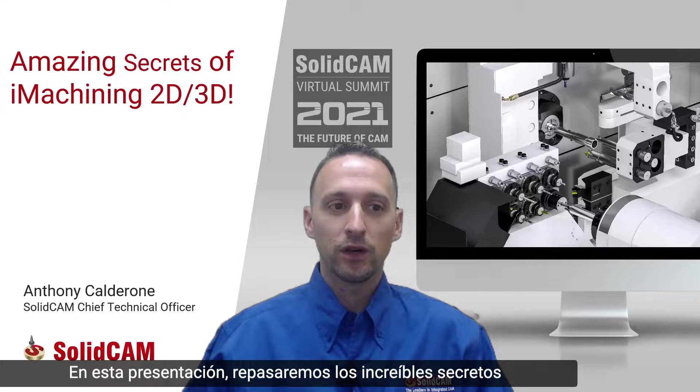In this presentation, we'll be going over the amazing secrets of iMachining 2D and 3D. So iMachining is made up of two modules. The first is the Intelligent Toolpath Generator, and the second is the Technology Wizard.

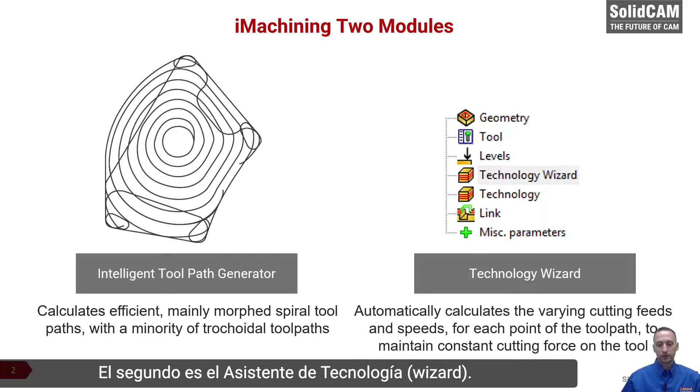So before we talk about the secrets of iMachining, let's talk about what iMachining does. iMachining is about saving cycle time at the CNC. Here we'll go over a couple quick slides about some of the savings. Here we have iMachining 2D being used on aluminum for electronic products. You can see we have aluminum 6061, and this customer had 400 pieces to produce. Their standard machining time before iMachining was 17 minutes, and this decreased to 6 minutes.

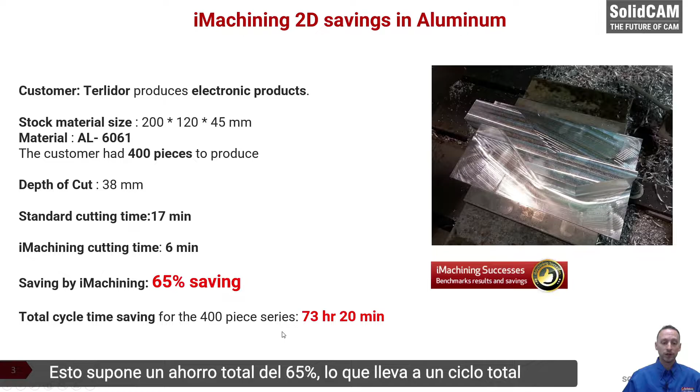So this is a total savings of 65%, which leads to a total cycle time savings on the whole part run of 73 hours. Here's a really small titanium bracket. This customer had 75 pieces to produce, and this part went from 17 minutes down to 3.5 minutes, which was a total savings of 80% per part, for a total time savings for the complete run of over 16 hours.

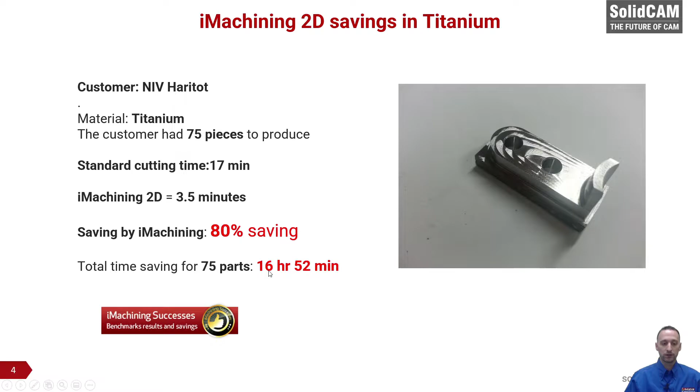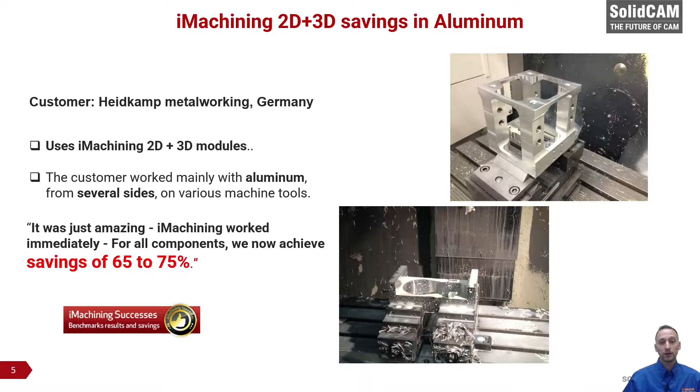We have a customer in Germany who uses a combination of iMachining 2D and 3D, which most of our customers are doing. For them, using aluminum parts, they're generally seeing savings of 65 to 75%. What's nice to notice here is that iMachining is giving an amazing savings amount, whether you're doing soft materials such as aluminum or something very hard to machine such as titanium. Here's another part which is cut in steel, and this part went from 146 minutes down to 28 minutes for just this one single component.

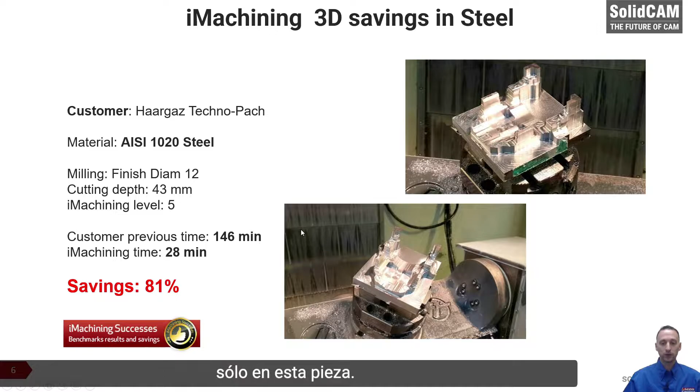Now, besides the reduced cycle time of iMachining, there's another major factor on the CNC, which is reduced machine wear. The iMachining toolpath, and we're going to be reviewing this, is a constant load toolpath throughout the entire cutting process. What you'll notice when most of our customers are cutting with iMachining is spindle load ranges in the 4 to 17%, and it stays constant through the entire machining cycle.

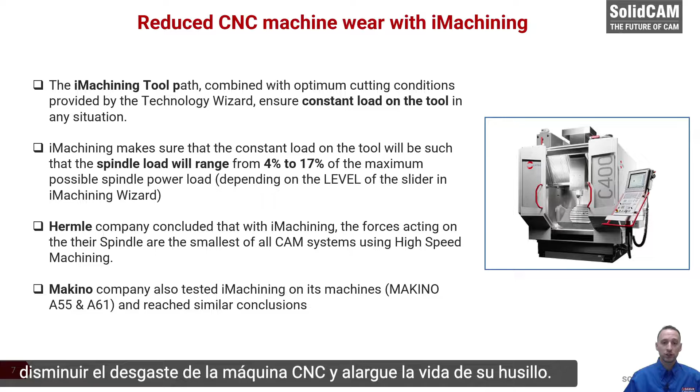Hermle actually concluded that iMachining was the best toolpath with the constant force of all high-speed machining toolpaths. And Makino also tested iMachining on its machines and reached similar conclusions. In the end, a constant load on the spindle is going to decrease your CNC wear and extend the life of your spindle.

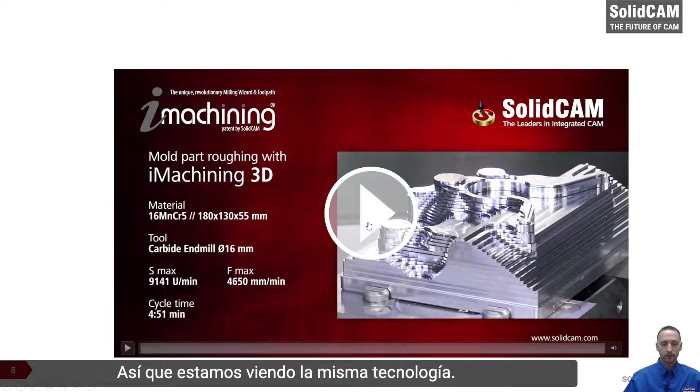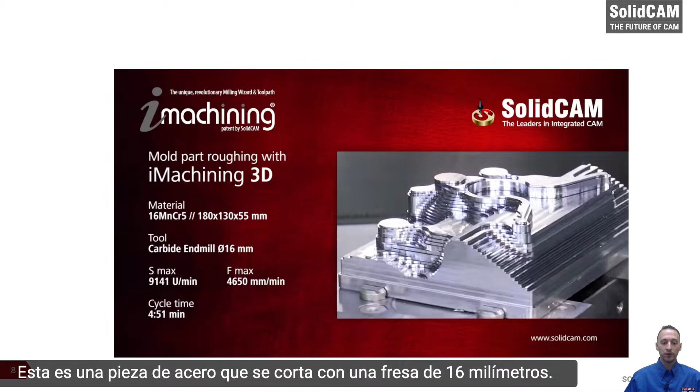So why don't we watch a quick video on iMachining 3D. Remember, iMachining 3D is using iMachining 2D, so we're seeing the same technology. This is a steel part being cut with a 16mm end mill. I know most people watching this are thinking this is aluminum, but this is steel. With iMachining 3D, this uses our step-up technology to bring the model to a near-net surface finish.

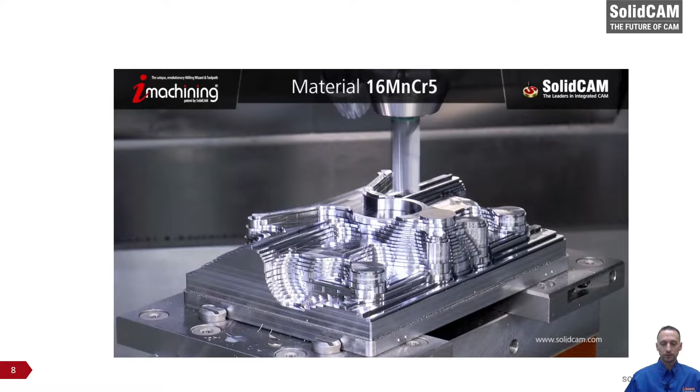Okay, so when we watch these high-speed machining videos online, many people are questioning, well, that's great, in a single video you can make something amazing show, but how does an everyday customer achieve this? I think this is really where iMachining sets itself apart from every other CAM system out there: our customers are achieving those results day in and day out on every part they cut. And I'm going to go over the secrets of why this works and how this works.

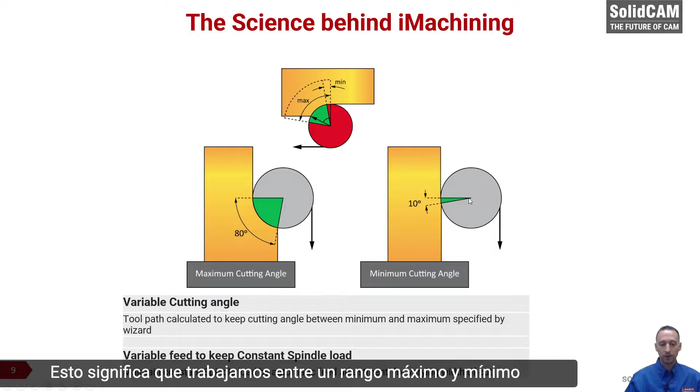So the science behind iMachining. The most important thing to note is that iMachining uses a variable cutting angle. This means we work between a maximum range and a minimum range. And we also use a variable feed to keep a constant spindle load. Now we use variable feed to keep a constant chip thickness. Before we get into chip thickness, I have a small video I want to talk about and actually show.

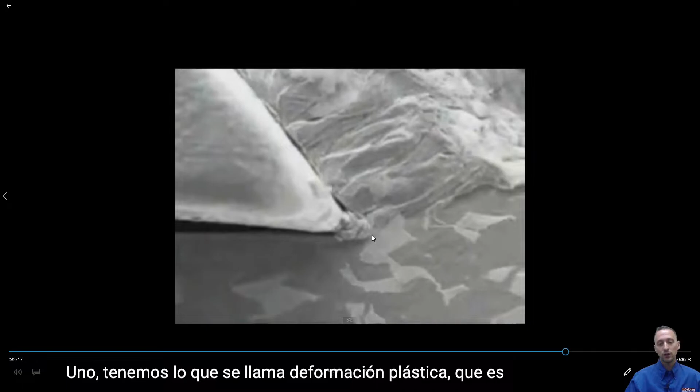This is a close-up video of not a helical end mill, but a turning insert, so that we could get a very high magnification of what the cutting process is. I'm going to press play and we're going to talk about this. What we see here is the insert being drawn across the material. What actually happens here is two things. One, we have what's called plastic deformation, which is at the tip of the cutter, you can see that the material is going from a solid to kind of like a soft liquid here.

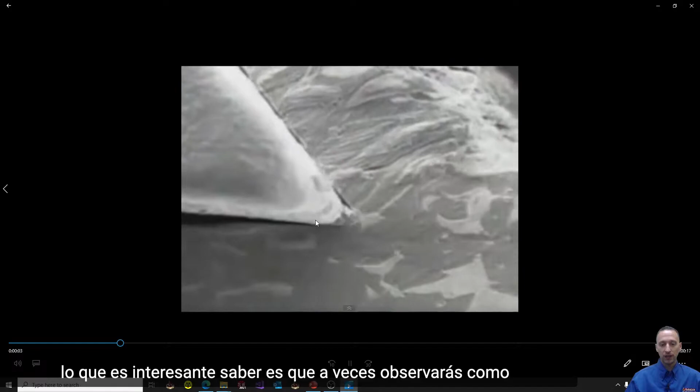And then you have shearing. So for the material to actually break the bond, so that way you get a chip, you actually have to have this plastic deformation and then the material is shearing off. As you watch this cut, what's interesting to note is that you will sometimes see some of the chunks come back along the underside of the tool, and then that rubs against the back part of the relief.

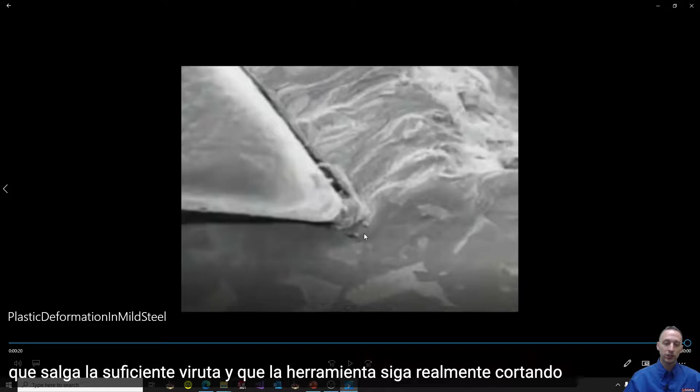Now, when we talk about cutting and machining, a lot of times people are talking about getting underneath the material, like pulling enough chip that the tool is actually cutting. And this is a very important thing to notice, because you could imagine here, if we weren't taking a big enough chip, this plasticized material right here would be constantly rolling around the bottom, and instead of getting a nice shearing effect where 99% of the material is being drawn up the cutting edge, you're getting maybe half of the material where some will come up, some will go down, and this is a problem.

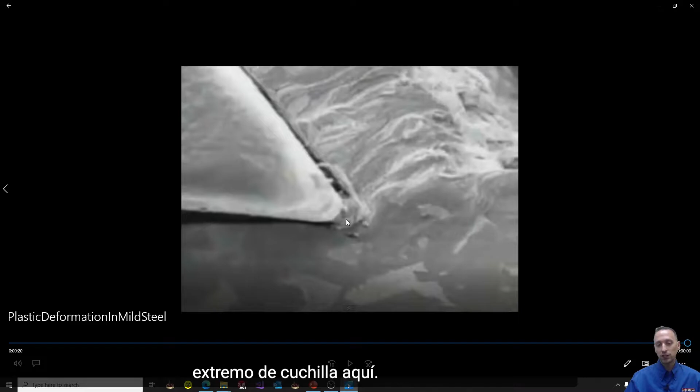And now when you do look at different tools for different materials, you'll see that this corner radius will change. Obviously with aluminum cutters, you have more of a knife edge here, and in aluminum they're able to cut more than having this brute force kind of shearing effect. But you can't use a very sharp edge in steel, because this plasticized material in steel will end up breaking down that cutting edge much quicker than it does in aluminum.

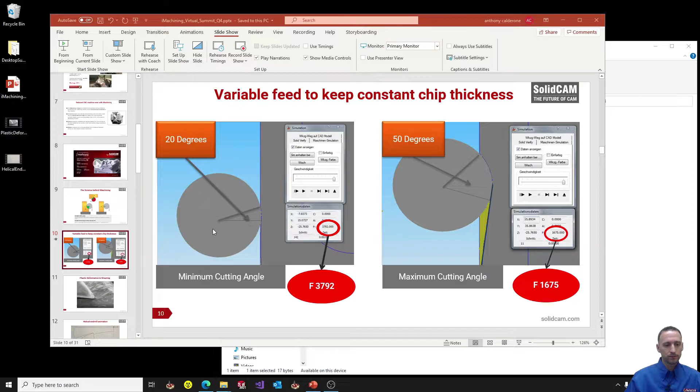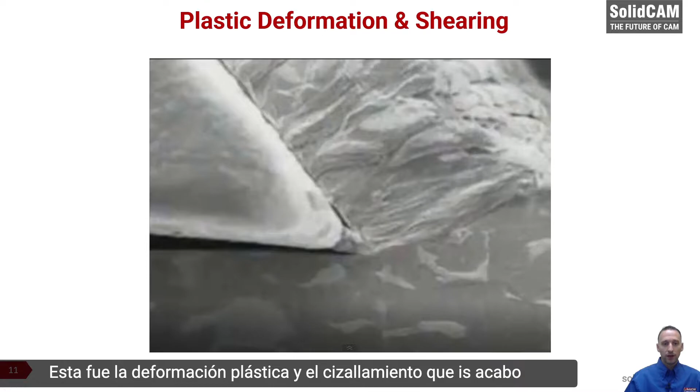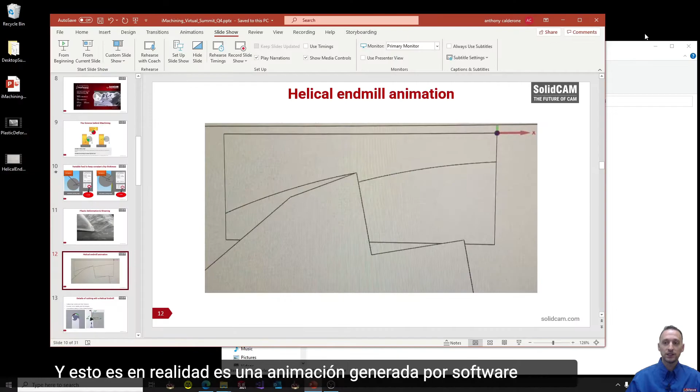Let's go to our slide again. So we use a variable feed to keep that constant chip thickness. This was the plastic deformation and shearing that I went over. And then I have one other animation I want to show, which is a helical end mill animation. This is a software generated animation, because we can't actually record a cross-sectional view of what a helical end mill looks like cutting.

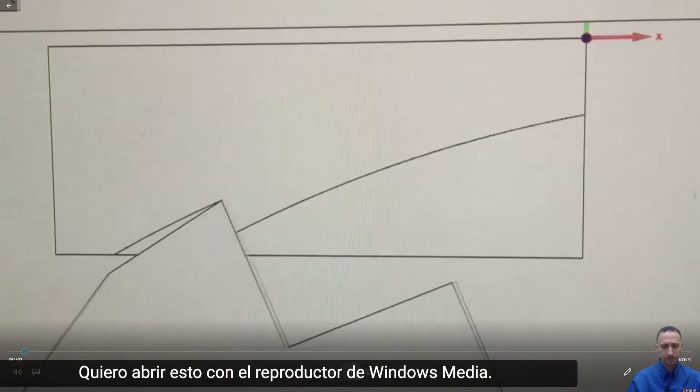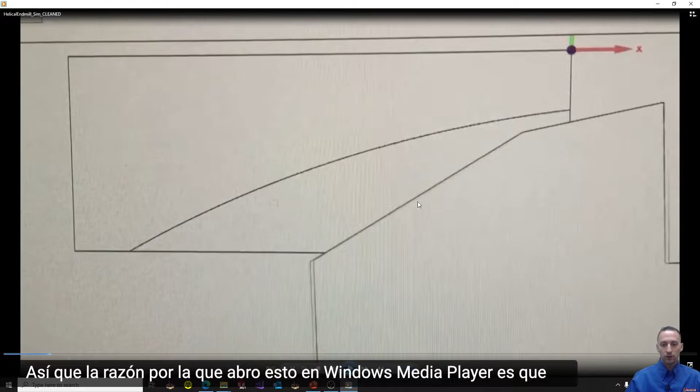Oh, I want to open this with Windows Media Player. So the reason I open this up in Windows Media Player is I am going to go frame by frame.

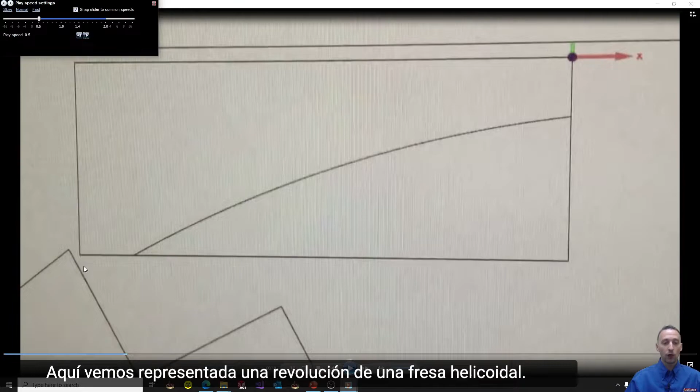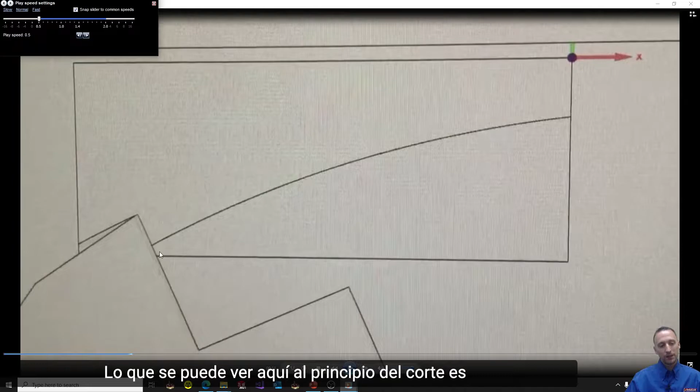Now what this animation is depicting, and when the flute comes back around I'll show it, is one revolution of a helical end mill. And so this is the x-axis. So basically the tool is moving along the x-axis, and as the tool is moving, it's also revolving, and it's cutting. So let's look at this process. What you can see here at the beginning of the cut is our chip thickness. So this is where that shearing is happening.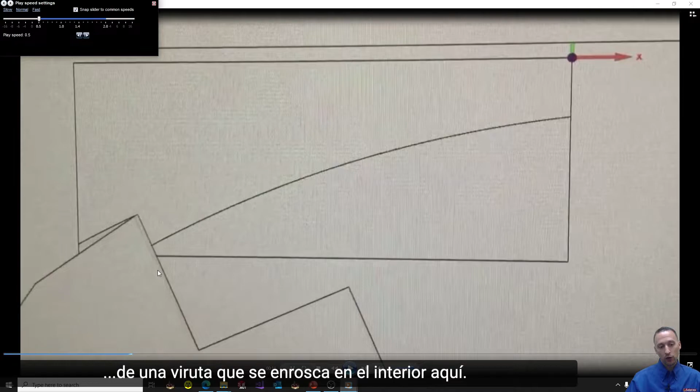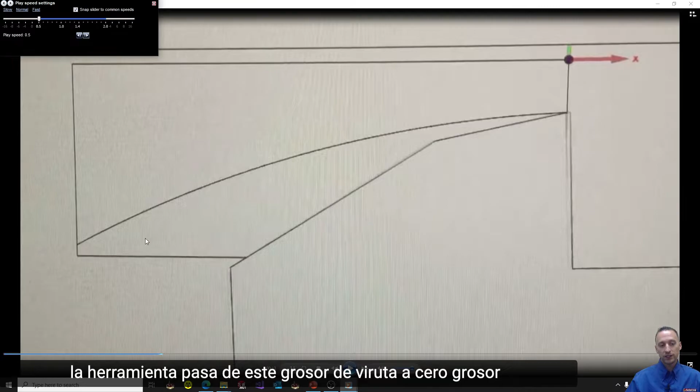So if we think about the previous video that we did, right here at this very tip, this is where we're getting that plastic deformation, and you now have material in the form of a chip curling along the inside here, and as the cutter does its full revolution, that's what it ends up with, one complete chip. And if we continue playing, you can see in this one revolution, the tool goes from this thick chip thickness to 0 chip thickness.

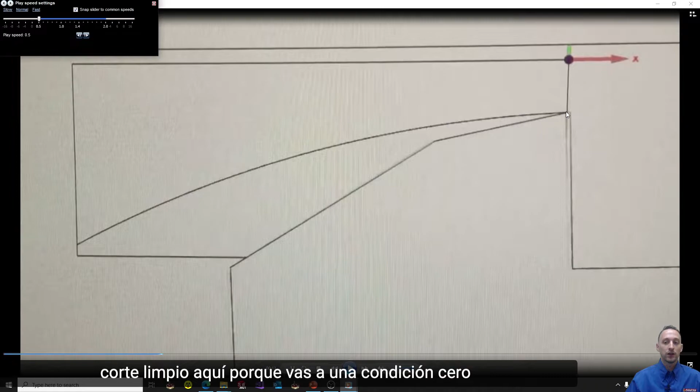So this is a very important thing to pay attention to, that the tool is actually going from cutting its full thickness of material to 0 material at the very end. So when you think back to that plastic deformation video, when the tool is down here at the bottom, you're probably not really shearing off and getting a perfectly clean cut, because you're going to a 0 condition and you get it kind of rolling along the back side of the tool here, and the material being plasticized is deforming and it can push a little bit.

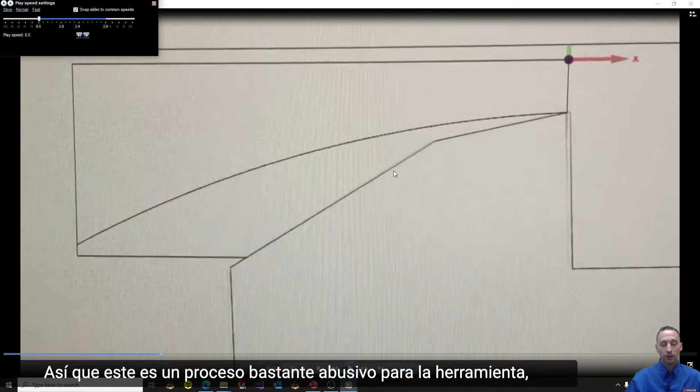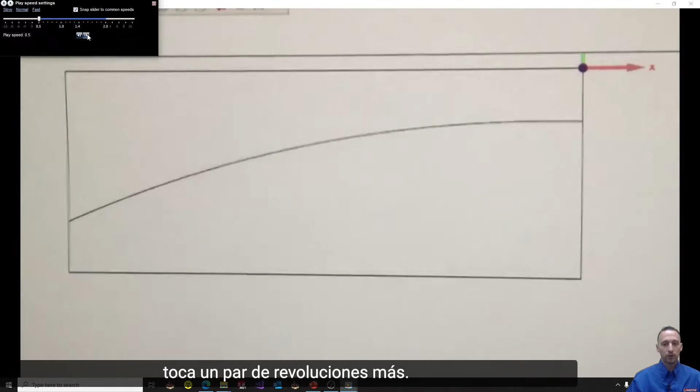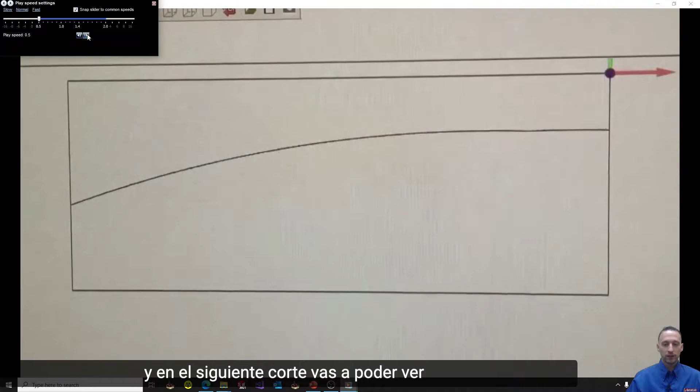So this is quite an abusive process for the tool, and I'll play one more revolution. So as the next flute comes around, we're going from the thickest part of the chip, it's revolving, and then we go down to 0. And I'll just play a couple more revolutions. I'll zoom in a little bit here. And once it does one more revolution, you're actually going to be able to see a little bit of the scallop on the wall.

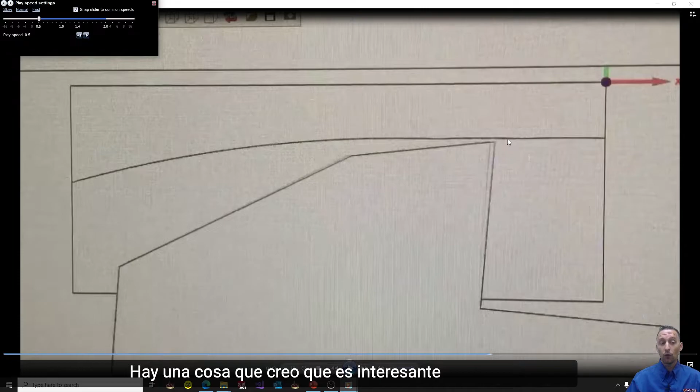So it's probably a little hard to see, but here you actually get the scallop, right? So this is the peak of the scallop and the peak of the scallop. So when we talk about the surface finish, or the RA finish of the material, this is the height of this scallop. And one thing I think is kind of interesting to mention is that there is the theoretical scallop or surface height.

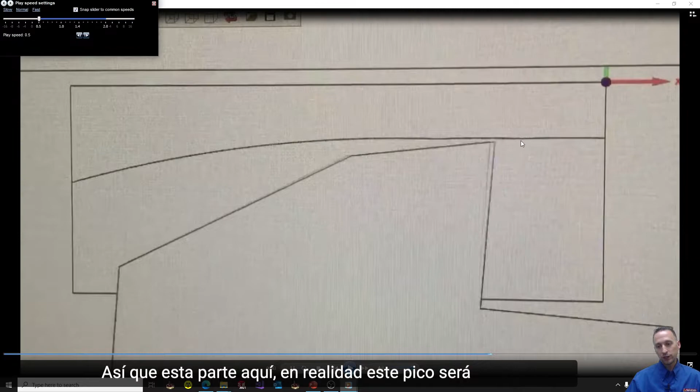And in iMachining, you can actually select the surface finish that you want. But in reality, when the tool is cutting, as we saw from that plastic deformation video, you don't get the perfect scallop like you think here. So this peak is probably almost always going to be a little bit higher in real life than what the theoretical perfect scallop would be.

Now we'll go back to our presentation from the current slide. So we talked about the helical end mill, so let's talk a couple things about climb, conventional, and full slot cutting. If we were to take that helical end mill and do a full slot cut, which is depicted here on the left, you can see that the tool would actually be going from the thinnest part of the chip, reaching to the thickest part at 90 degrees, and then coming back down to the thinnest part.

Now you can imagine, if you're cutting something like aluminum and you have a very sharp cutting edge, it might be okay when you're starting down here at the thinnest part of the chip, but it's still not good for the tool, because it needs to deform that chip right there at the cutting edge, and it needs to plasticize it enough that it can shear it off. So anytime you're starting with conventional cutting like this, you're not getting cutting right away, and that's bad.

So realistically, when you're doing conventional cutting, the tool is probably not really pulling a chip until it reaches about here, or maybe here in the cut. So that whole time, the tool is really just jamming itself, and more than a chip being formed, you're getting that glob of material that's actually rubbing along the back side of the flute on the relief, which is really bad.

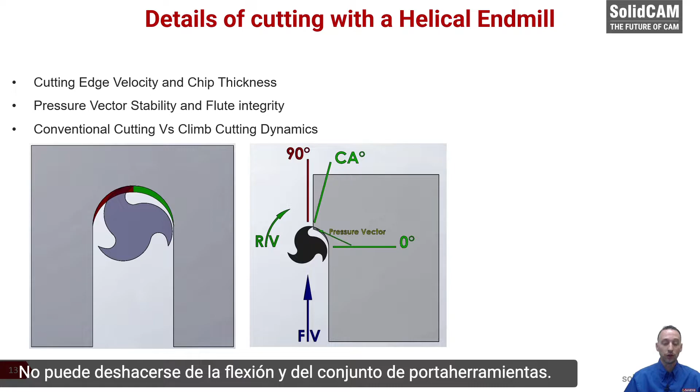So you're actually getting opposing forces from the beginning of the cut and the end of the cut. You're getting pressure this way at the beginning, the tool is revolving, it's coming this way at 90 degrees, and then down at the bottom, it's coming this way again. And that is not good for the spindle, and it's not good for the tool, because there is flex. You cannot get rid of the flex in the tool holder assembly. So we don't want that flex, and we want to try to limit it.

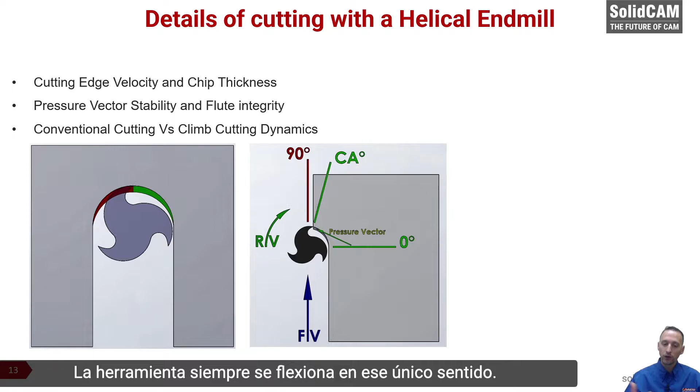So iMachining is limiting itself to this 80-degree range, so that way we're always climb cutting and keeping that cutting direction the same, so the tool is always flexing in just that one way.

Chip thickness and chip load: are they the same? As we know, if we open up a machinist handbook, everything is going to be about chip load. And chip load refers to the amount of chip at 90 degrees. So this is the thickest part of our chip. Chip load and chip thickness are the same value at 90 degrees. When we are actually cutting not at 90 degrees, the chip thickness is not matching chip load anymore. So let's say we had the same chip load and we're trying to run a chip load of 4 thou.

When you are cutting less, let's say 40 degrees, the chip thickness is actually not 4 thou. So what does that mean? That means the tool, let's say for that material on that tool, it wants to reach a 4 thousandths chip load or chip thickness where the tool will properly shear away the material from it and form a nice chip. Well, if you're going less than 90 degrees, your chip thickness is actually smaller.

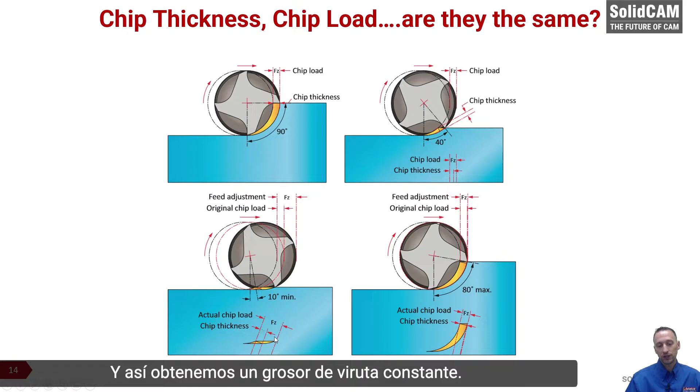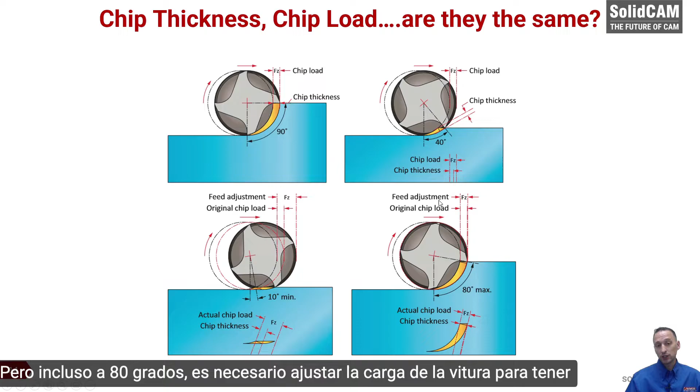And if we come all the way down to like 10 degrees, here's this little graph. You can see the original chip load is here. This chip thickness is very tiny if you don't increase the feed rate. So what iMachining does is we actually adjust the feed rate so we have a constant chip thickness. So if this tool wants to have a chip thickness of a certain distance, we need to maintain that. And if we look at 80 degrees, you can see that 80 degrees is pretty close, but even at 80 degrees, you need to adjust chip load to have a constant chip thickness.

Another important part of getting a constant chip thickness through the cut is feed of the center of the tool versus the edge of the tool. So if we think about runners on a racetrack, the runner on the inside track is always staggered further behind everybody else because he has the shortest linear distance around the track. The same thing is happening with an end mill because the CNC is controlling the feed rate at the center of the tool. But the reality is the cutting is happening at the edge of the tool.

So in iMachining, we adjust feed rates on arcs or linear segments that represent arcs. This means on internal corners, we are actually slowing the feed rate down so that we can get a constant chip thickness. If we don't correct the feed for an internal corner, you can see that FZ, the chip thickness out here at the edge of the cutter, is huge. We want this FZ right here along the straight wall. You can see up here it's about 2 to 2.5 times larger. Now when we correct the feed rate and slow down for internal corners, the same chip thickness that we have on a straight line is the same that we're getting on an arc.

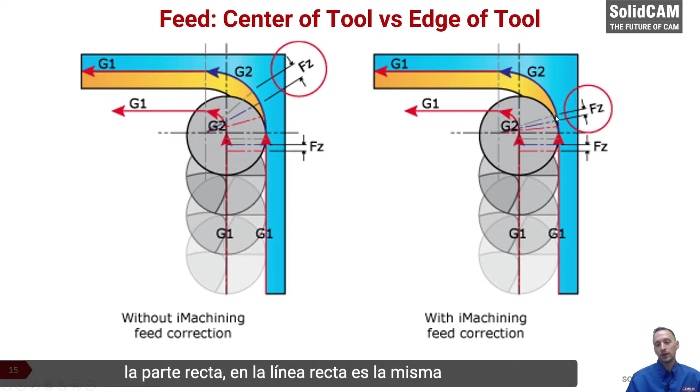So what is an iMachining toolpath and what does it look like? A couple of main things you're going to note with iMachining. One, we have controlled step overs. So you're never going to see any overloading of the tool, and this is a lot of the engagement angle stuff that we were talking about. You're also going to notice that there's exact stock machining. This means there's no air cutting, and this is important because we manage how much of the tool is actually engaged with the stock at every part of the cutting.

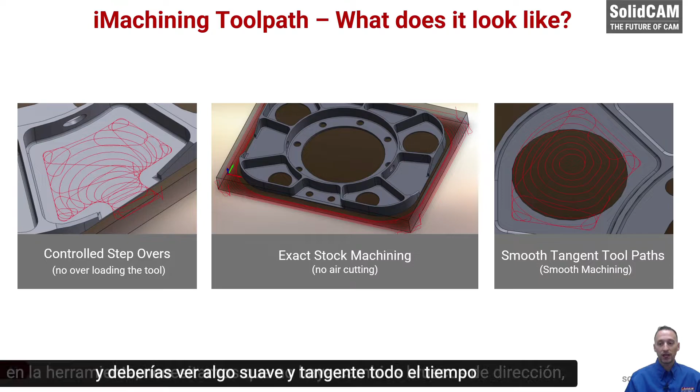And then we have smooth tangent toolpaths. Obviously, if we want to control the load to be the smoothest on the tool, we need to not have abrupt direction changes, and you should see something smooth and tangent the entire time.

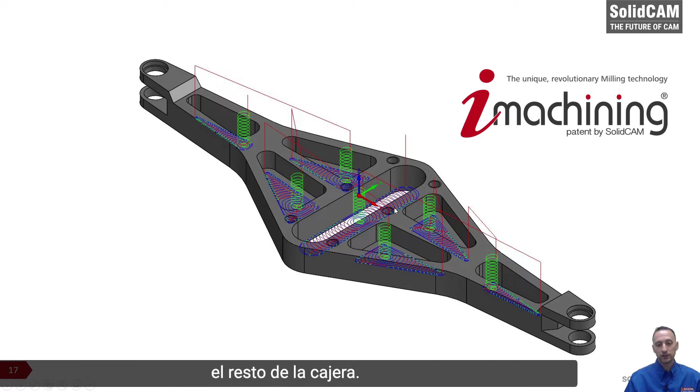So here's a part with several pockets in it. Generally what you're going to notice with iMachining is, if it's a closed pocket, you're going to see a helical entry into the center of the pocket. You're going to see a morphing spiral from that circle out to whatever the shape of the pocket is. And then you're going to see parallel passes to clear out the rest of the pocket. This general process you're going to see no matter what the geometry is.

Now here we have an example of a pocket with some islands. Generally, with a lot of our customers, we don't see many pockets that have islands in them. It seems like electrical housings like this one are parts that generally have multiple islands, or at least more than one island. But this is a nice example to show the process of what we do.

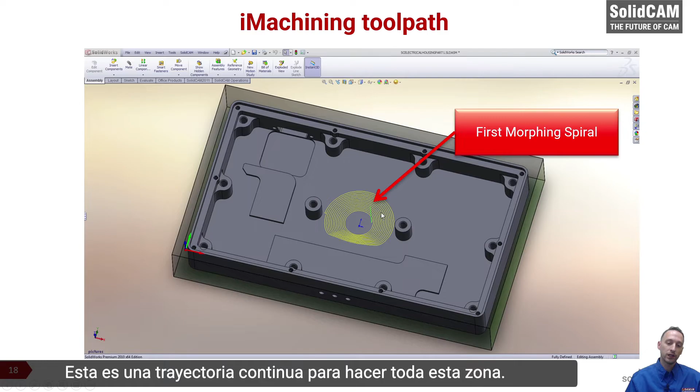So first we have a morphing spiral. We pre-drilled the hole so we didn't see the helical entry. It plunges down into the hole. This starts from a circle, and then look at the shape it morphs out. You can see more dense toolpath down here and a lighter toolpath up here. So this is one continuous pass to do this entire area.

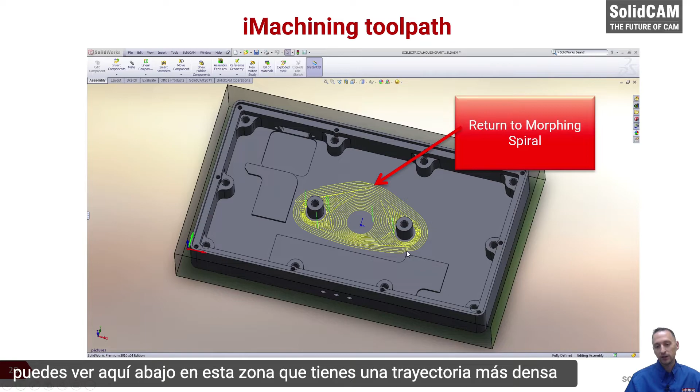When we hit the islands, we have what we call separating islands or separating channels, and these go around the islands, and after the islands are done, we are now able to go back to morphing spirals. And once again, with the morphing spirals, you can see down here in this area, you have a denser toolpath, and along the other areas, you have a thicker toolpath.

Then we run into an island again, so then we make a moat around it, and then we go back to our morphing spiral. So that's the basis of what you see with the iMachining toolpath. Now, what do we do when we run into iMachining 3D?

So as you saw from iMachining 3D, we do scallop step up. And what is scallop step up? What this does is we give a constant net surface finish across the entire model. And so all the user has to do is say what scallop he wants, which is the distance from the final target model. And then iMachining automatically calculates different step downs and step ups to achieve that.

So over here on the left-hand side, we have just a cross-section of a very simple tapered pocket. So as we see on the less steep area, we have 7 or 8 passes. On the steeper area, we only needed 4 passes. Both of these give the same scallop height.

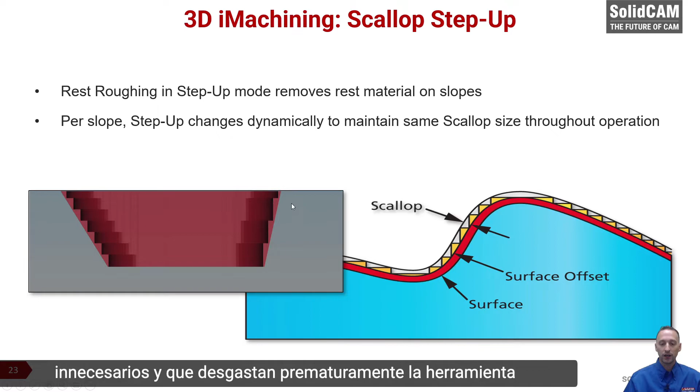This makes the toolpath extremely optimized, and it makes the toolpath not do excess cutting, as opposed to what a lot of people have to do, which is just pick the smallest step down possible, and then you just get a lot of redundant cutting that you don't need, and that prematurely wears out the tool, besides it being a much longer cycle time. iMachining 3D also has minimal repositioning.

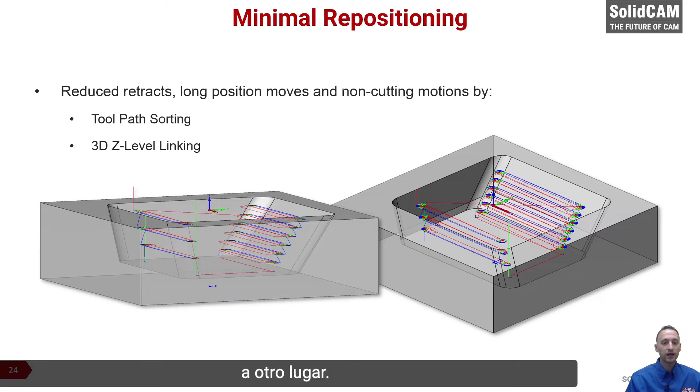So you can see, like in these pockets, this is just rest machining. The tool is able to stay down through all the machining. This minimal repositioning is a huge time savings at the CNC. And I think everybody is used to seeing in the CNC, every time the machine does rapid moves going from one spot to another spot, it can be some of the slowest times in the machine because the thing's just coming from this area, bouncing over, coming over here. And in 3D, this happens a real lot because you have a complex model, so it's cutting over here, it's cutting over there, and it goes around to the different areas.

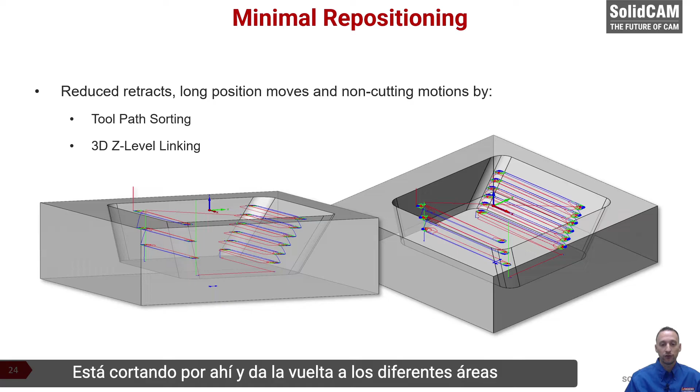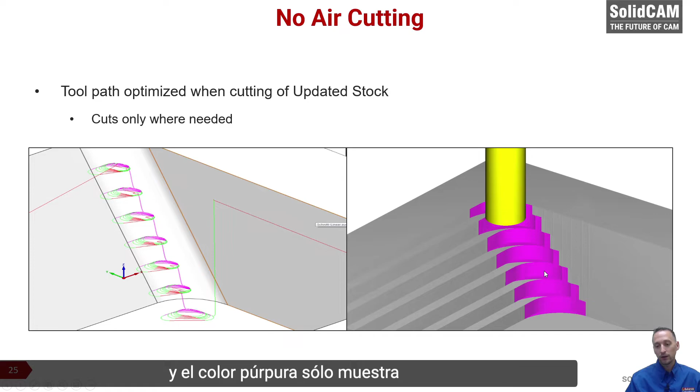We also have no air cutting, as I said before, so this is whether it's iMachining 2D or iMachining 3D. We are only cutting areas where there's material. I mean, this is just a beautiful example of just cleaning out this corner. And over here on the right-hand side, you can see our solid verification, and the purple color is just showing the area where the rest machining is accounting for.

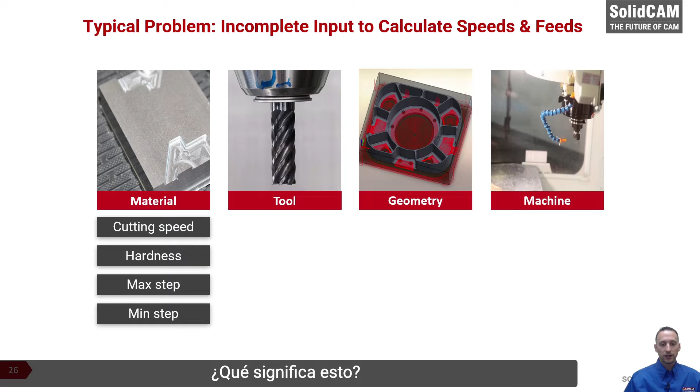Now, besides just the toolpath side, we now have a problem with feeds and speeds, and this is the second part of our module we talk about. When we're doing the machining process, we have the material, the tool, the geometry, and the machine. So what does this mean? This means for the material, us as programmers, we need to take into concern the cutting speed, the hardness of the material, min and max step overs.

For the tool, we need to know the length of cut, number of flutes, helix angles, chip thickness, hardness. For the geometry, we need to know the depth of cut. For the machine, we need to know the spindle speed, the maximum feed rates, the maximum horsepower, the memory size of the machine. And these are all variables that we, as a programmer, have to manage.

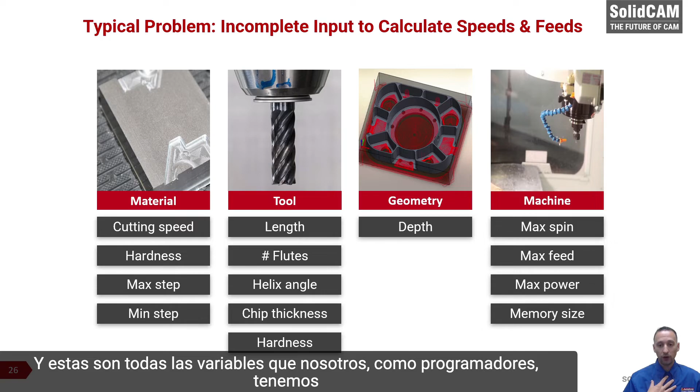The solution here is the iMachining Technology Wizard. What the iMachining Technology Wizard is, it takes all the guesswork out of all of that. And what it does is it takes in machine, material, geometry and tool. And the final result of it is it gives you a condition of feed rate, step over, spindle speeds, and depth. And most important is it synchronizes all of this for you. So whenever anything changes that needs to be adjusted, the iMachining Wizard handles all of it together.

For instance, you might just have to be able to adjust for the maximum RPM of the machine. Well, at some point, if you try to run your machine at, let's say, 16,000 RPMs all the time, your feed rate might actually be too fast for you to hold the chip thickness that this toolpath is requiring.

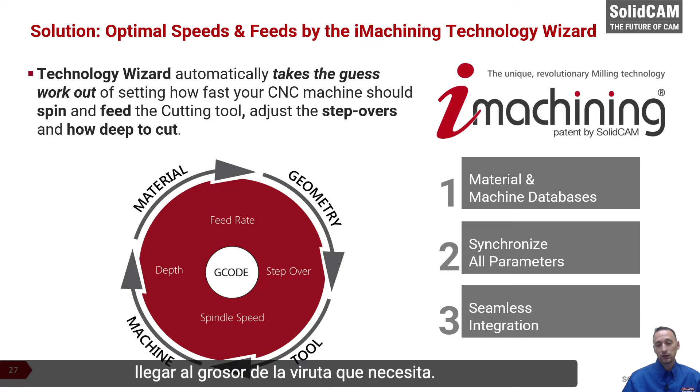So you actually have to have a lower spindle speed to hit the chip thickness that you need. The iMachining Technology Wizard is taking care of all of this for us. The iMachining Wizard also has our slider. And what does this mean?

This slider is here because iMachining is not able to understand 100% of the process of what's happening at the CNC. This is why we still need a CNC programmer who is using his intelligence to understand the fixturing, the tooling. Is it a really long extended tool? What type of vibration problems are you having?

So the iMachining slider gives you the ability to go from the lowest level to the highest level with interpolated steps. Most of our customers are able to go right to level 6 and have great success cutting right out of the box. But if you know you have extra vibration or weak fixturing, you can lower the machining level down, or you can bring it up if you know you got a nice stubby tool and really good fixturing.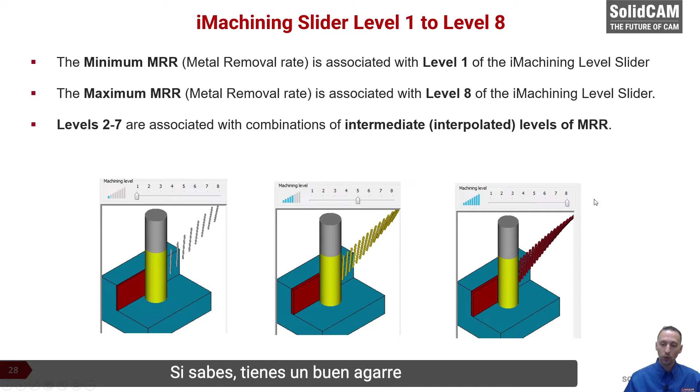Another part of why iMachining works so well is helical end mills have something that we call axial contact points. And the way I like to describe axial contact points is with an actual shell mill doing facing. So let's say you have a 4-flute shell mill. When the tool first enters the material, we hear the dunk, dunk, dunk of each insert hitting the material.

And then once you get 180 degrees of the face mill fully in the material, you hear it quiet up, right? So you hear the dunk, dunk, dunk at the beginning, and then you just hear that constant sound. And then at the very end, when the tool breaks out of the material, you hear that dunk, dunk, dunk again.

And when we look at the surface finish of a face mill, you always can see the beginning of the cut when the tool is trying to enter. Then you see the cut along the entire geometry, and then you see the end result. This is because you have multiple teeth or multiple inserts in contact with the material, and that gives a stability to it. The same thing is happening with helical end mills.

If you have less than 1 flute in contact with the material, you know what you're going to have? Vibration. Every time the tool revolves, you have the tool loading and unloading entirely. So it's going dunk, dunk, dunk, for however many RPMs you're doing, times the number of flutes.

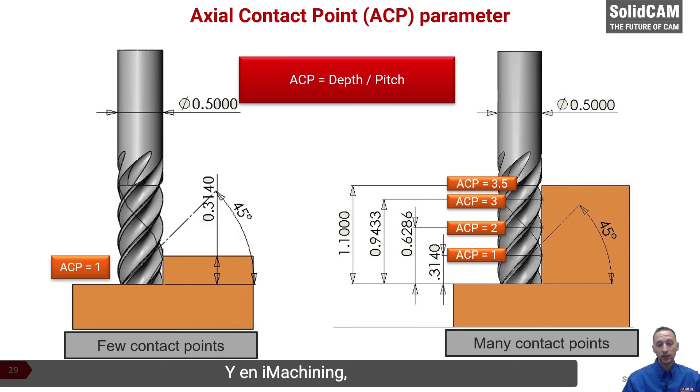When you do deep depth of cuts, you get multiple axial contact points. This puts multiple teeth in contact with the material, and you get silent cutting. There's no vibration. And in iMachining, we give feedback on that. So those are some of the secrets of why iMachining works. This was not meant to be a presentation on using iMachining in SolidCAM.

I'm really excited to be able to talk about the technical aspects of iMachining because this is really what separates us from our competitors. We care about the machining, and we care about all the load and the cutting that is happening at the CNC. A lot of the things that I talked about here are the same things that Ken talked about in his interview. I tried to give a graphical depiction of what was going on, and I hope everybody understands that not using iMachining in your machine shop is really a disservice, and it is the single biggest thing you can do to decrease your cycle time and get more machining capacity.

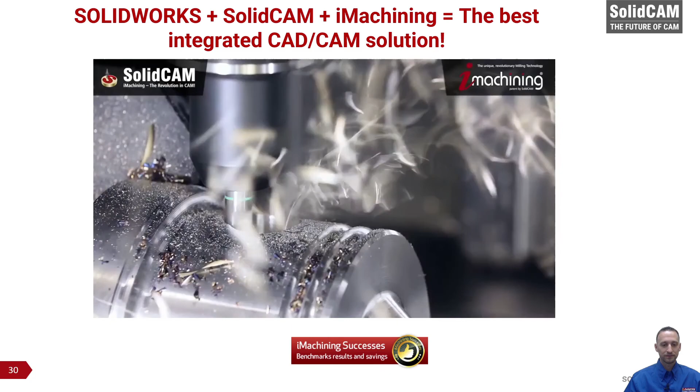And I will end off the presentation with the best quote I think I ever heard, from Greg Burns: "My hope is that not too many people learn about iMachining because it is my biggest competitive edge." I think Greg says it perfectly, and it is the truth.